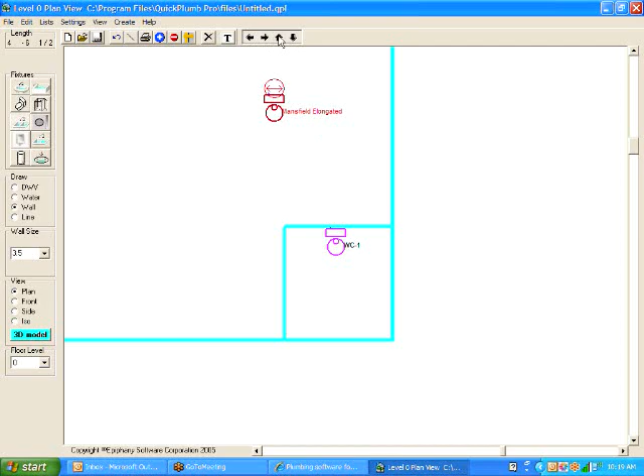Every click of an arrow moves the fixture a quarter inch. If I hold that down, you can see the fixture moving in the direction of the arrow. That's helpful when you're trying to place a fixture and be real precise in its location.

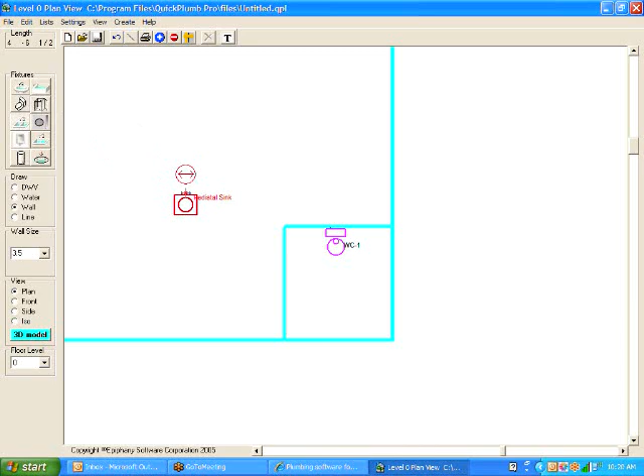It's a whole lot easier to do that than to move the mouse around. Now I'm going to add a lavatory to this bathroom, so I'll click the lavatory icon and bring it over here to this corner, and click the left mouse button again to place it.

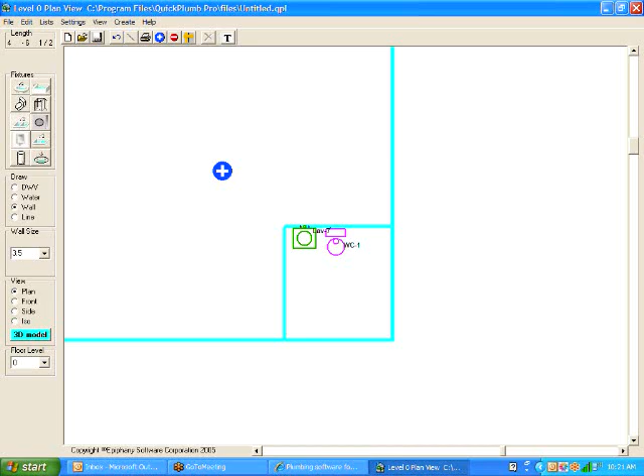Now let me demonstrate a means of zooming in and out, because you may be zoomed out right now, and you're definitely going to have to zoom in and out while you're drawing. There are actually two ways to do that. One, to zoom in, you can click this plus sign in the top toolbar, and then draw a frame that will incorporate the area you want to zoom in on. Hold the left mouse button down in the upper corner of the frame, and while you're holding it down, drag the mouse to the opposite corner. When you release the mouse button, that area will come into focus.

Yeah, I didn't know how to do that. At first I would put the plus, then click on it, and right away it would just blow up the whole picture. Yeah, it would zoom in a lot closer than you probably wanted to. Yeah, it would. I like that feature. So what you do is get the plus symbol, and then, like you said, just drag it over.

Now, the zoom out symbol doesn't work that way. You just click it. You don't have to select anything, you just click it. Could you demonstrate zoom in again, please?

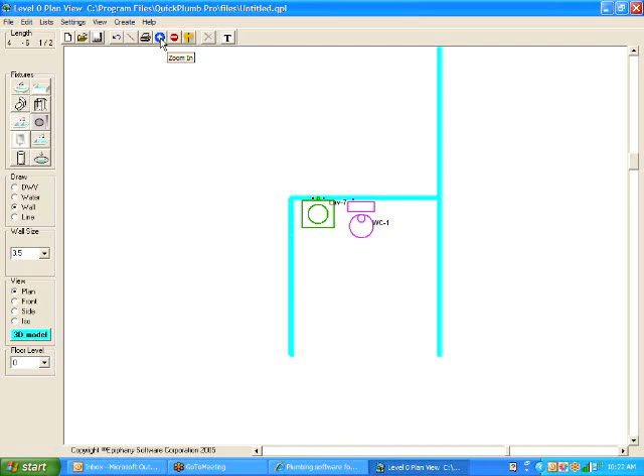Sure. Click on the plus and click in one corner of your desired frame, then come down to the opposite corner, and release the button once you've got the area framed out.

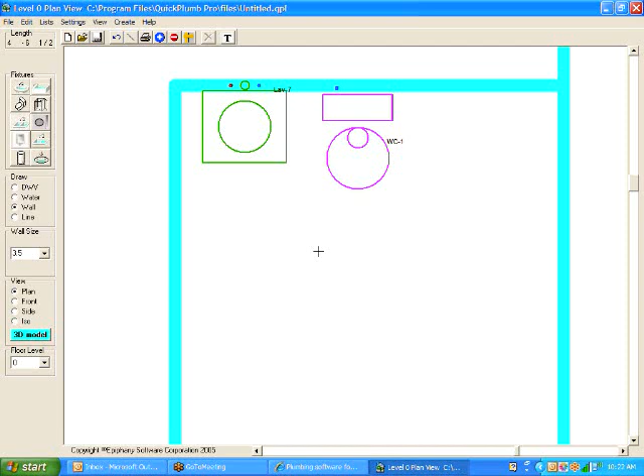Now there's another way to zoom in and out, and I don't know if you've been doing this or not, but your mouse has a right mouse button. Just hold that right mouse button down and move it either away from you or closer to you. When you move it away, it zooms out, and when you move it closer, it zooms in.

Can you demonstrate that one more time, please? Sure. Now I'm working with the right mouse button. To zoom in, I'm going to move the mouse closer to me while holding that right mouse button down. When you press the right mouse button down, you'll see a double arrow going up and down, telling me I can move the mouse closer or away from me. When I bring it closer, it brings the picture closer.

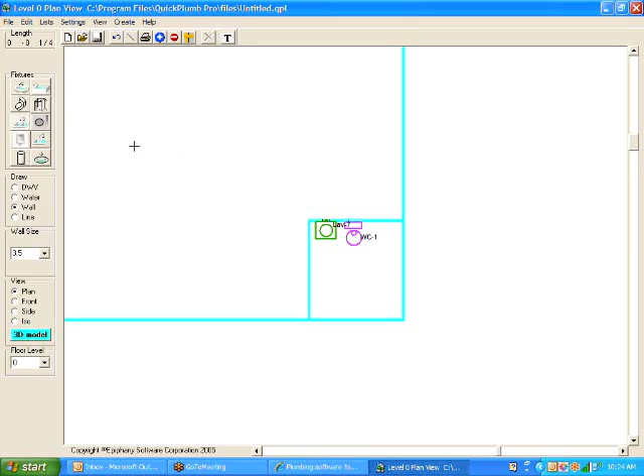Okay, now I'm going to go ahead and move on to adding a tub to this bathroom. I just click the tub icon and bring the tub onto the plan. I set it in the desired location and click the left mouse button again, and there it is.

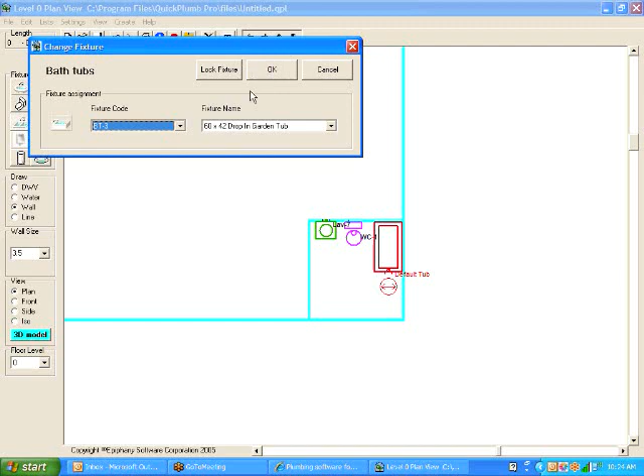Now, any of these fixtures can be changed by double-clicking a fixture. Just click it twice with the left mouse button, and it brings up this screen here. In here, I can change it to any kind of fixture I want that's loaded in my system. Once I find the fixture I want, I click OK, and as you can see, it changes the dimensions of that fixture.

So again, I'm going to double click on it, select the fixture that I want to put there, and click OK. And there it is.

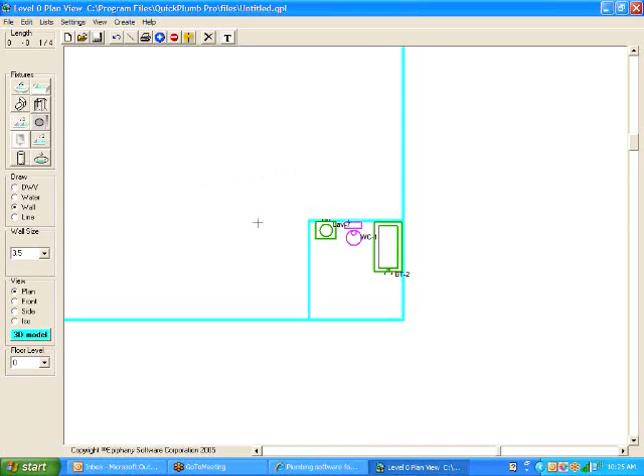Now I'm going to go ahead and add another wall there, and we'll just make this the bathroom and this the closet. Okay, so that pretty much covers drawing the fixtures.

Now we can actually move to the water lines, or the DWV. It doesn't make any difference at all, you can go back and add or edit any of this stuff at any time. So let's just do the DWV at this point. I'm going to select the area where I want to bring the building drain into the house, and I'm going to start at the downstream end of the building drain. Let's say my sewer's out here at the street. I'll go ahead and put a little note here that indicates the location of the sewer.

Now I'm going to start with my 3-inch building drain at the low point. I'm going to drag it up while holding the left mouse button down, and stop it anywhere I want up in here, because I can change it later. I'm just going to bring it onto the plan. Now, I have to tell QuickPlumb how deep in the ground I want this sewer.

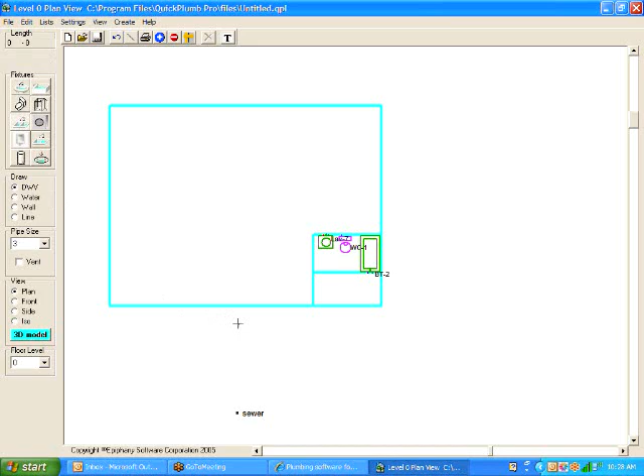I'm going to delete that, and I'll start over again. Hold the left mouse button down and drag the pipe up and into the house, and we'll change the distance later. And now it wants to know how deep below the current floor level I want this pipe. I'm going to use an arbitrary depth of 24 inches. And we'll click OK. And there it is, 24 inches below the current floor.

Now, just to illustrate that, I'm going to change the view or the angle that we're looking at this plan. So in order to do that, we're going to click on, in the view toolbar, the side view right down here. Just click it one time. And what that did is it gave me a perspective from the left side of the house.

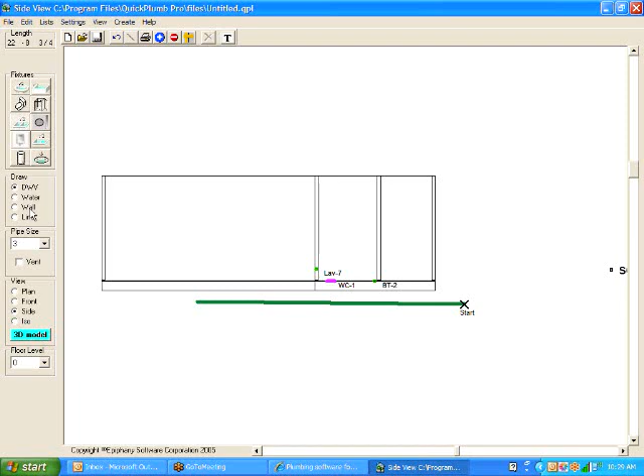I'm going to zoom in, and I'm going to demonstrate that distance that we just typed in. So I'm going to use a dimension line, and I'm going to go from the floor level to the pipe, and that will display that distance there. And I'm going to click on it, which will highlight it. It'll turn that line red, and I'm just going to drag that line over to the starting point of the line of our building drain.

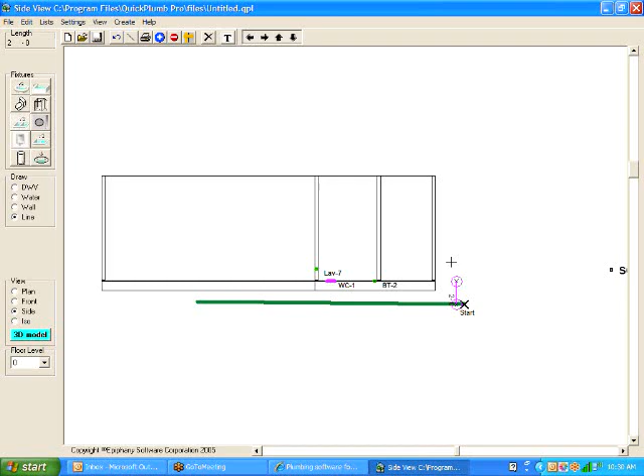And I'm going to turn it off. Now you see that that's 2 feet 0 inches. That represents that 24 inches that we just typed into the dialog box. And that was the distance from the floor level to the center of the building drain.

It'll make more sense when you review it probably, but do you follow what I'm saying there, Mr. Mendiez? Yes, sir, I do. Okay, and so you can clarify that if they have any questions at a later point then. Yes, sir. And also they can review this whole lesson online.

So once again, from what you're explaining - I'm sorry, I was helping another student out - but when working with, see, what view are we working with? What view? Oh, now we're in the side view. Side view, okay. And so once again, in the side view, the student can draw in the side view, isn't that correct? That is correct. I hadn't gotten to that point yet.

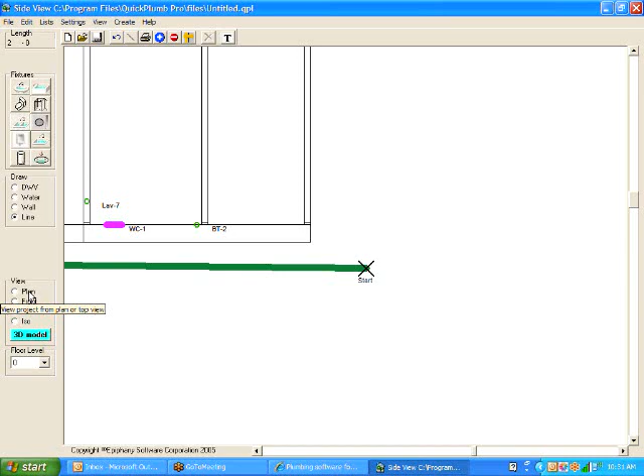I was more or less wanting to illustrate what that 24 inches represented when that dialog box came up. Yes, right, no, I see what you're saying. I'm sorry, I wasn't following along there. Oh, that's okay, no problem. Yeah, I'll just delete that and run it again.

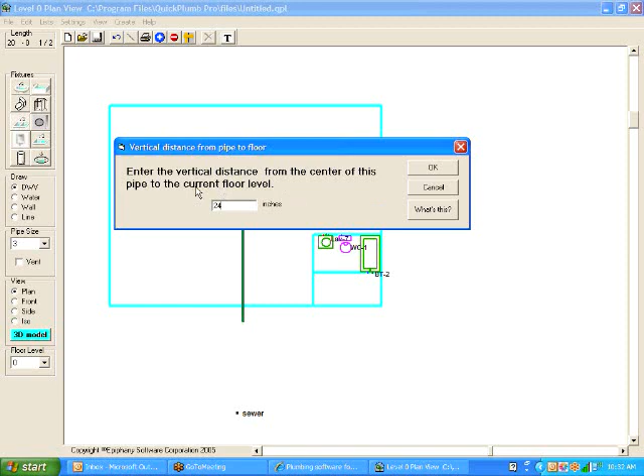We'll draw the building drain, and that 24 inches that we typed in here, that is the distance from the current floor level, which is 0 now, to the center of the building drain. And I click OK. And I was just illustrating what that distance represented. In other words, it's the distance from here, the floor level, down to the center of the building drain.

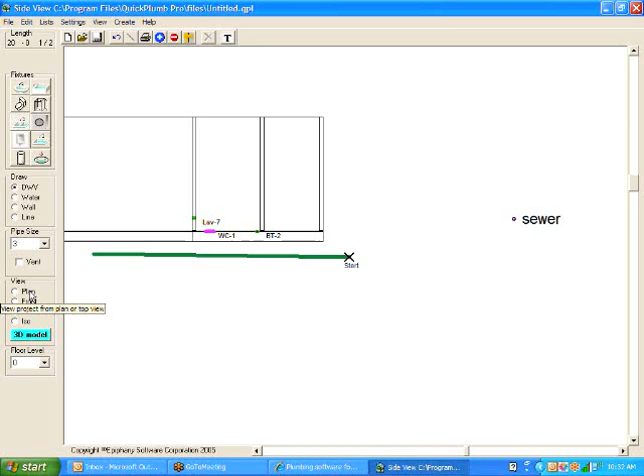So what he's saying here, guys, at this point is he's just demonstrating once again what that distance looks like for the pipe in the ground, underneath the foundation, or underneath the floor itself in relation to the finished floor. You do have the option to draw here, but I wouldn't do that at this point, unless you're caught in time out, but don't do that at this point.

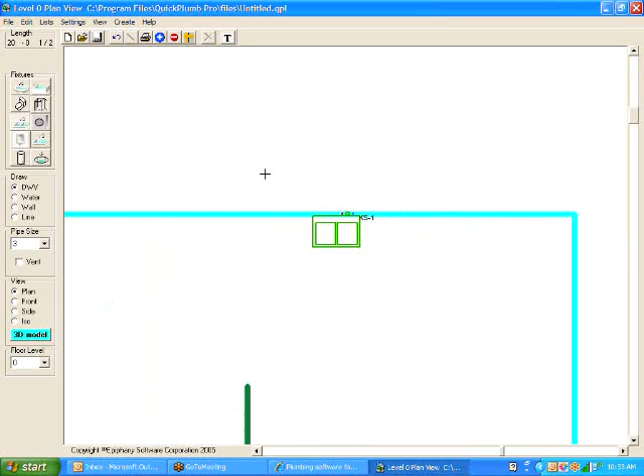Okay, yeah, we'll get to that, the drawing, in just a minute. Okay, now we have our building drain in place, and I'll just go ahead and add some more fixtures real quickly. I'll put a kitchen sink over here. Obviously, we're missing some walls, but that's okay.